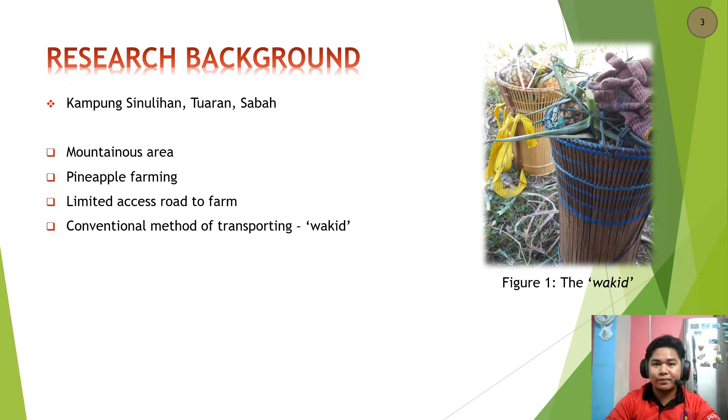However, due to steep topography, there are limited access roads constructed, and most farms are not accessible by road. Therefore, the farmer have to use traditional rattan basket called wakid to transport their product to the nearest access road. To solve the problem experienced by the community, a cableway system is proposed. Why we choose the system? Basically, there are three advantages of the system, which is first, it has lower installation and maintenance costs. Second, the system causes lower environment damage, and lastly, it has high reliability.

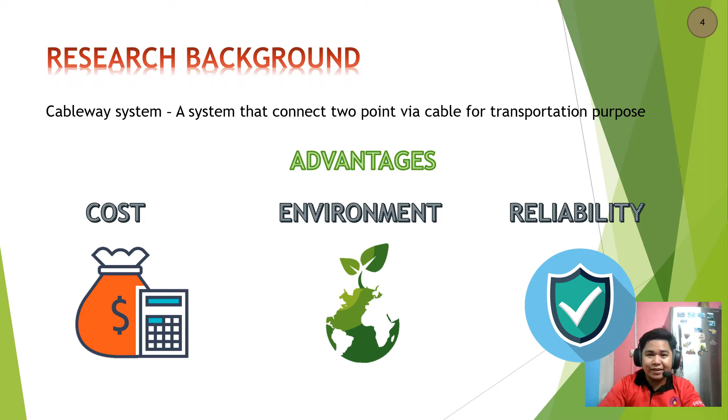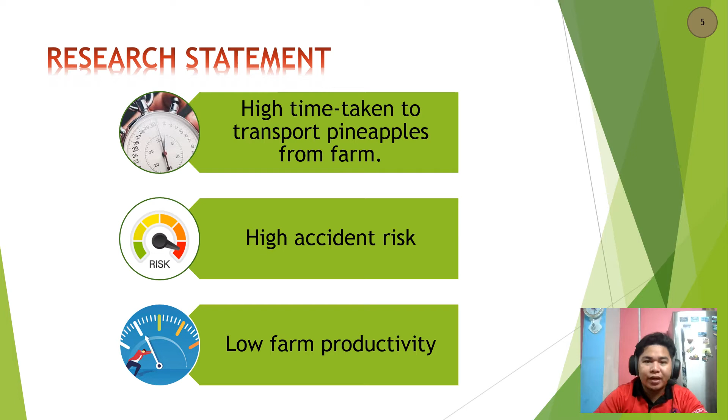The cableway system are proposed because the conventional method of transporting, which is using the wakid, take a longer time to transport due to limited capacity. The farmer also exposed to accident risk due to uneven terrain and slippery, especially during the rainy season. The cableway system is expected to increase the productivity of the farm. There are three main objectives that we want to achieve throughout the project, which is first, to determine the related parameter of cableway system. Second, to develop a cableway system, and lastly, to validate the cableway system.

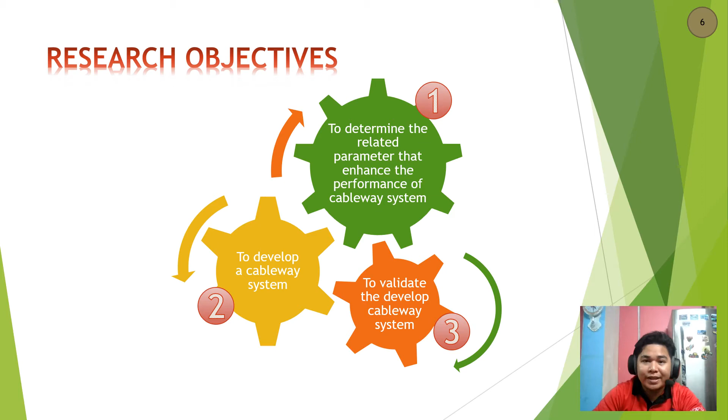The second part of the presentation is literature review, in which we study deeper to find information related to project from various sources. In pineapple farming, we are interested to find the information regarding the planting method, harvesting cycle, and economic perspective. According to Bartholomew, the pineapple are best to be planted in acidic soil, and it's only need approximately 11 to 14 months for the pineapple able to be harvested. The price for pineapple in September 2020 is RM2.50 per kilogram.

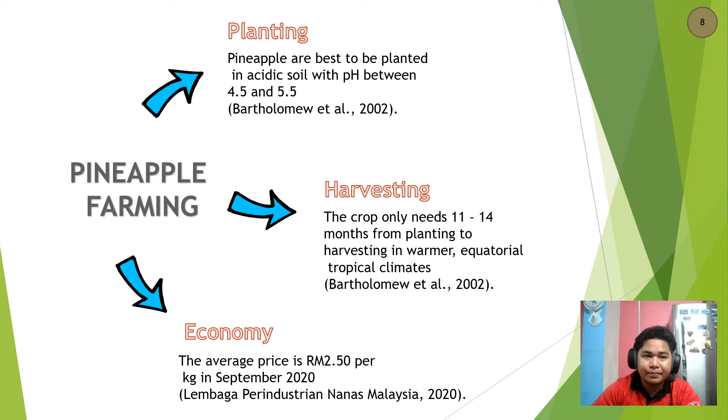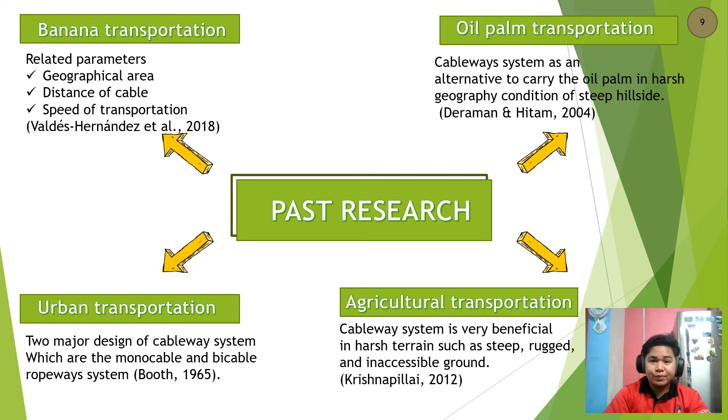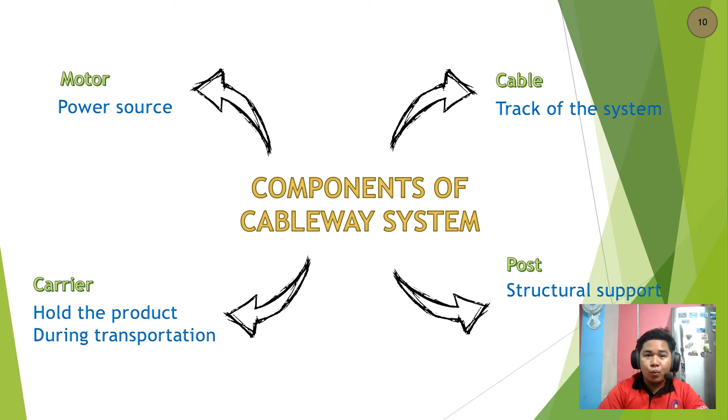The cableway system are widely used in various fields such as urban transportation, mining, and agriculture. Each of them propose a different design and layout based on their purpose. The cableway system able to install and utilize even in steep slope and muddy soil. By comparing the past study, we came up with the conclusion that cableway system is made up of motor, cable, carrier, and post. Each component has its own responsibility and rely on each other to ensure the system works smoothly and effectively.

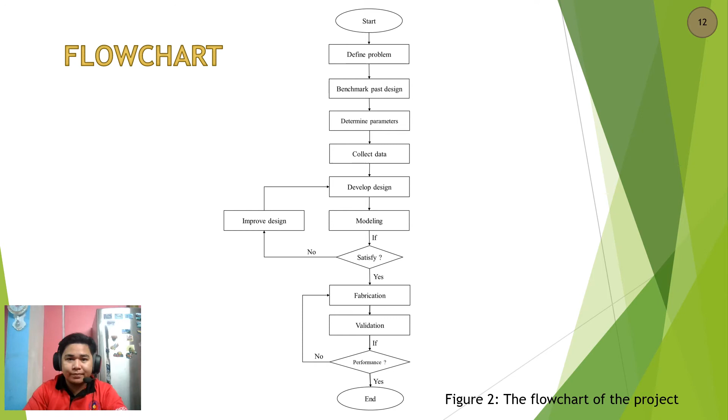Next, the final part of the project is methodology. In this chapter, we discuss on how the project should be conducted in manner so it runs smoothly. The flowchart is the backbone of the whole project. It shows the workflow of the project from the start to the end. Throughout the project, it involves a decision making whether the design will be accepted or need improvement. In the concept generation phase, we identify the main function and sub-function of the system. Then, we determine the component of the system. The component can be made of different material. For the project, there are 5 main components, which is cable, motor, post, carrier, and driver.

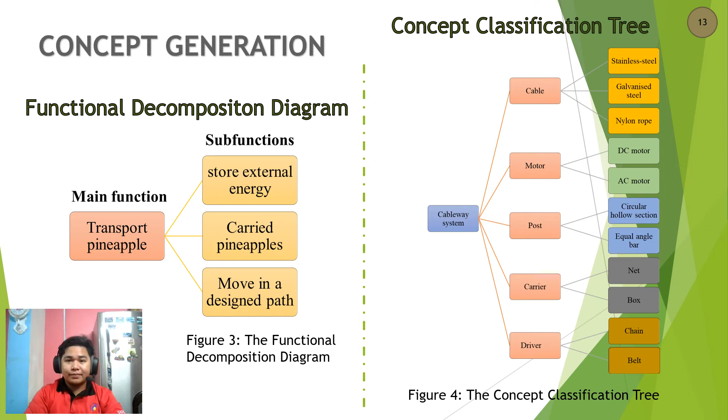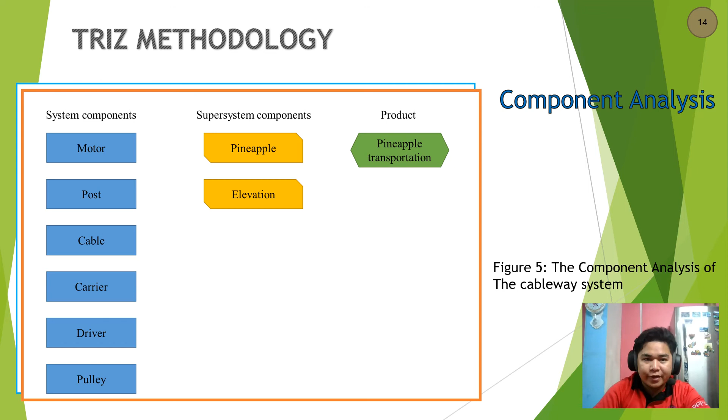Next, TRIZ methodology is a series of methods for us to find the best design for the project. First, we do a component analysis to classify the components according to its group, whether system component, supersystem component, or product. The second step in TRIZ methodology, we do an interaction analysis. In this step, we determine what components interact to each other. However, it doesn't show exactly how it interacts, but we can see that some interaction is undesired.

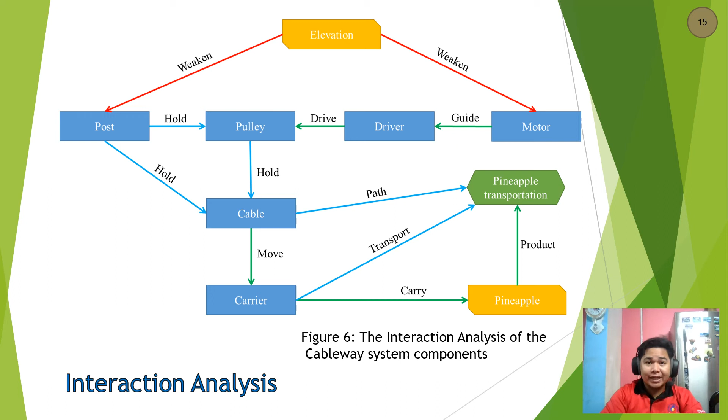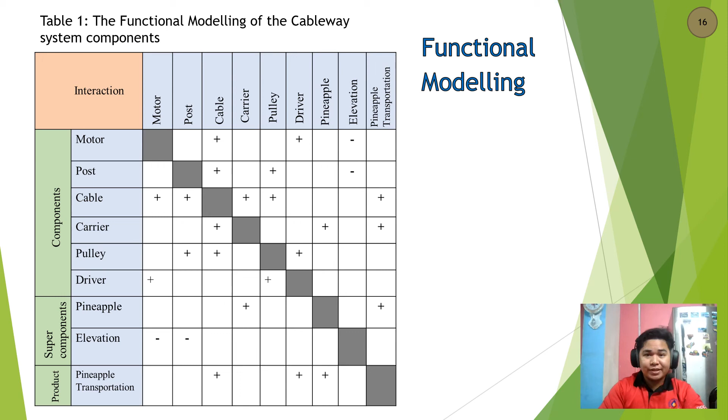The data from the interaction analysis can be summarized in functional modeling. The interaction that denote as positive sign show an interaction that is needed and important. However, for the negative sign is undesired and unavoidable. This interaction can be minimized in TRIZ analysis. TRIZ analysis is a method to solve a contradiction of two features that denote as negative sign in functional modeling. This analysis allows us to evaluate our design based on the solution offered.

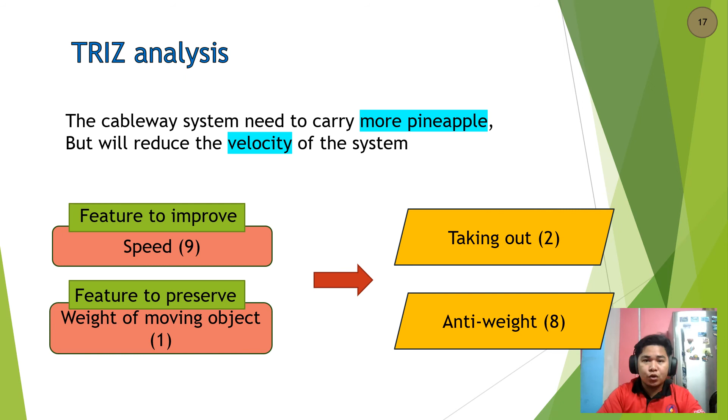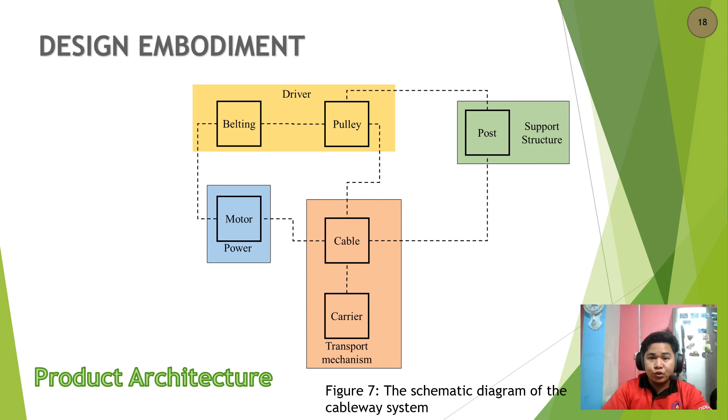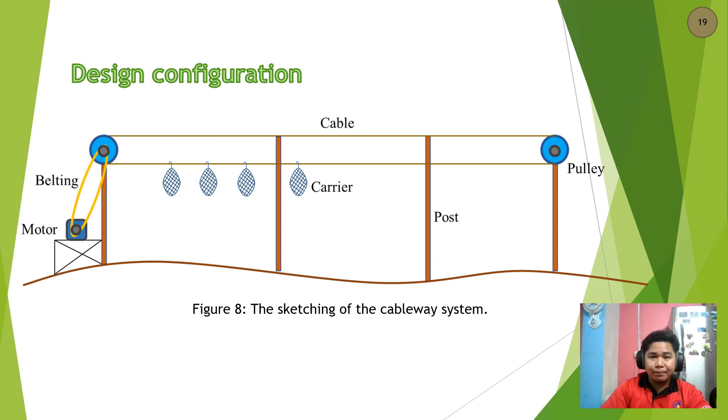In design embodiment, we classify each component based on its working mechanism and try to illustrate the whole system to show the full operation. Then, we determine the configuration of the system. It shows how each component should be oriented and placed as for a real setup. The motor is the main power source of the cableway system. To select the most suitable motor, a few elements need to be considered, such as gradient of the slope, length of the cable, velocity, and weight of the load.

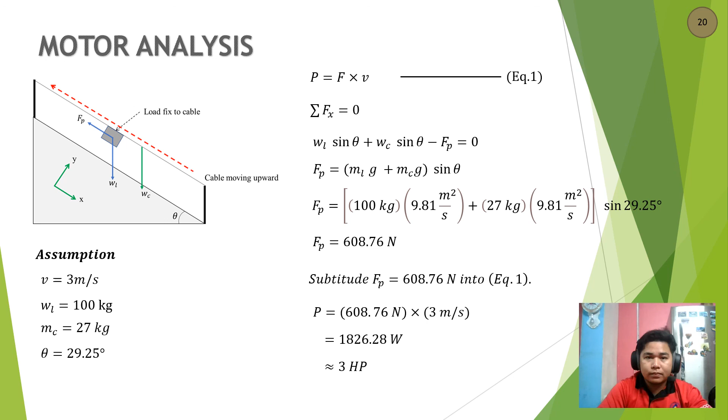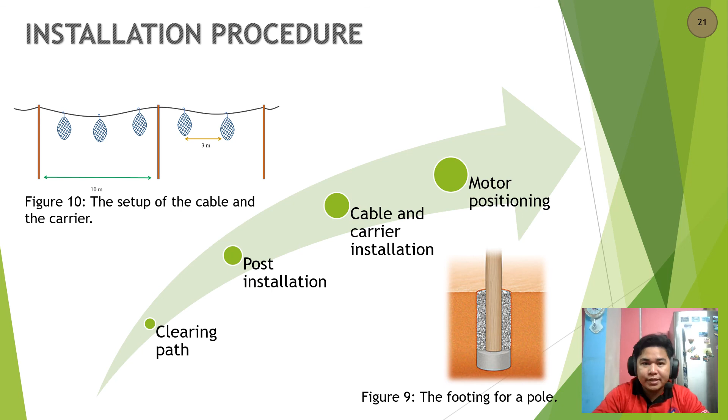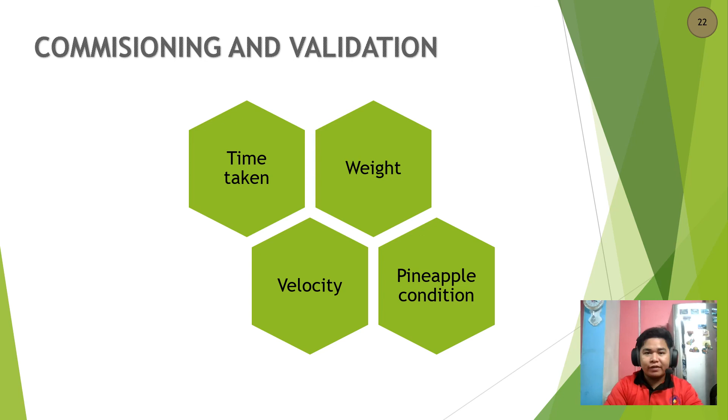Installation is the most critical step in the project. Each component will be installed as per design and defined. This process begins with path clearance and creating footing for the post. Finally, the commissioning and validation process. The aspect that need to be verified is the time taken, weight of the load, velocity of the system, and the condition of the pineapple before and after transportation.